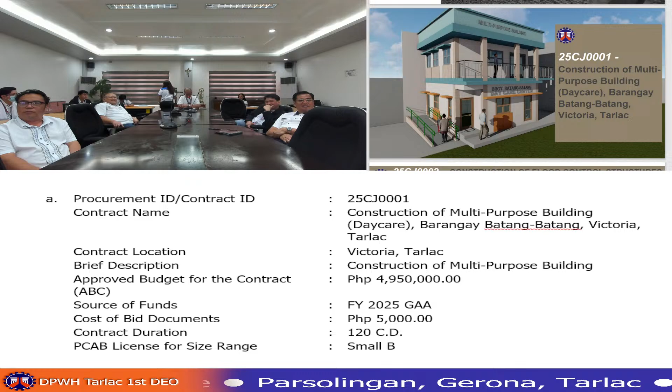Now we call on Engineer Romel Del Mundo for 25CJ0002.

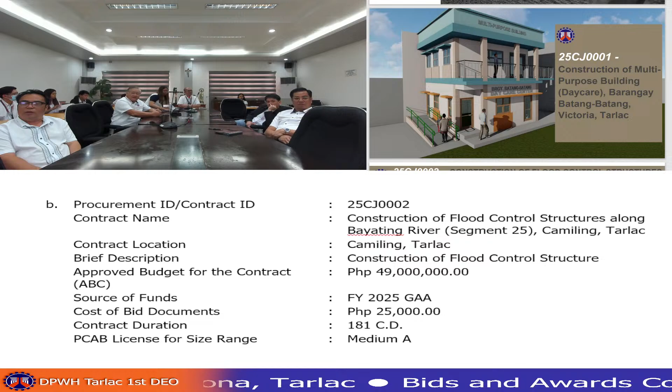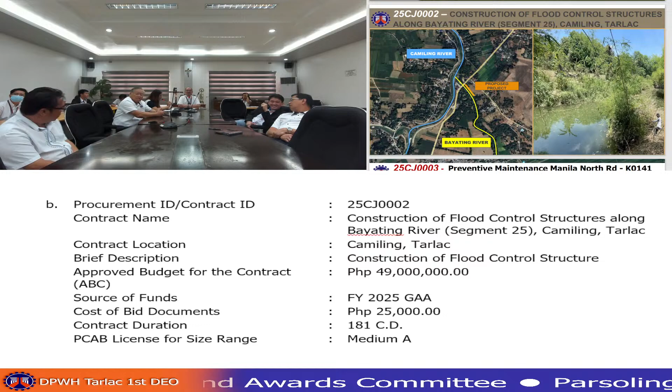Good morning everyone, I'm Engineer Romely Del Mundo from Planning and Design Section, presenting to you contract ID 25CJ0002 with contract name Construction of Flood Control Structures along Bayating River, Segment 25, Camiling, Tarlac. It has a target length of 165 linear meters, consisting of slope protection with road component. The project duration is 181 calendar days and with a total project cost of 49 million pesos.

The scope of works includes surface courses with 0.25 meter thick Portland cement concrete pavement having a width of 6.10 meters, miscellaneous structures of single arm, 10-meter pole, solar LED roadway lighting, 125 to 150 watts each, earthwork consisting of clearing and grubbing, structure excavation of common soil and embankment from borrow, and bank and slope protection works with reinforcing steel of grade 40 and 60, structural concrete with 20.68 megapascal compressive strength, and the type of steel sheet pile to be embedded is Z-type.

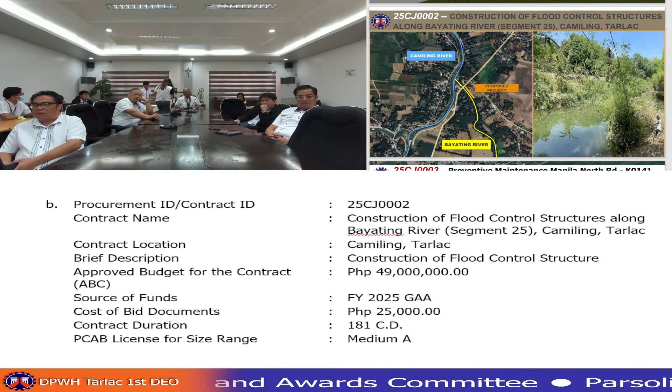Well, anyway, do we have any questions? How about on our YouTube channel, do we have any audience there? So thank you. So we call on Engineer Elmo Bernardo for 25CJ0003.

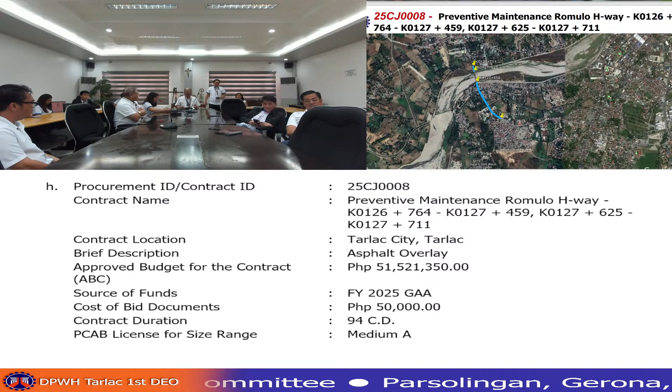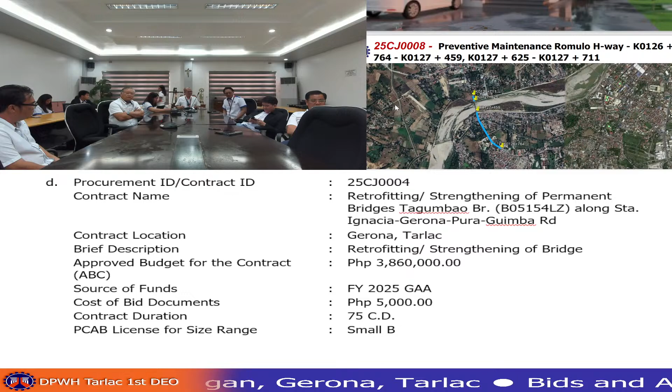Good morning po. I'm Shaira Jimel S. Guevara. This is to introduce contract ID 25CJ0004 with contract name Retrofitting, Strengthening of Permanent Bridges, Tagumbao Bridge, B05154LZ along Santa Ignacia Gerona Pura Guimba Road. The anticipated contract duration is 75 calendar days.

The bridge has a length of 680.80 meters, 2 lanes with a width of 3.66 meters, which includes the following scope of works. Bridge construction, which includes 7.32 linear meter expansion joints, 30 mm gap steel finger type, 202.85 linear meter epoxy injection on crack. That's all po. So do we have any questions?

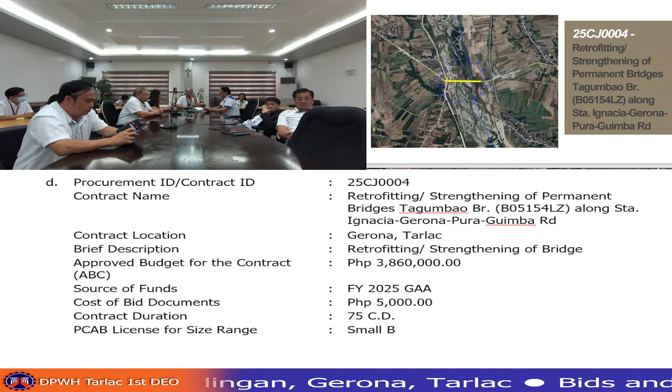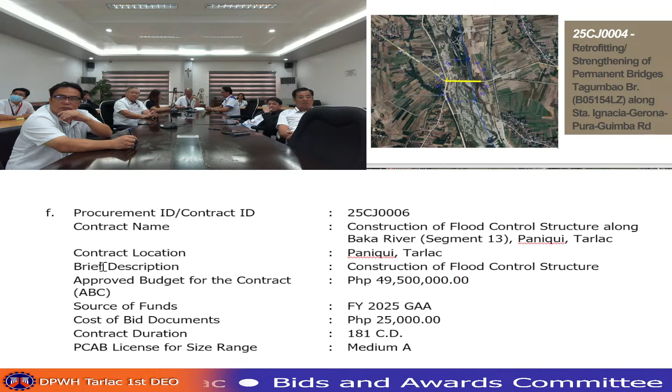The scope of works includes surface courses with 0.25 meter thick Portland cement concrete pavement having a width of 6.10 meters, earthwork consisting of clearing and grubbing, structure excavation of common soil and embankment from borrow, bank and slope protection works with reinforcing steel of grade 40 and structural concrete with a compressive strength of 20.68 megapascal. The type of steel sheet pile to be embedded is Z-type.

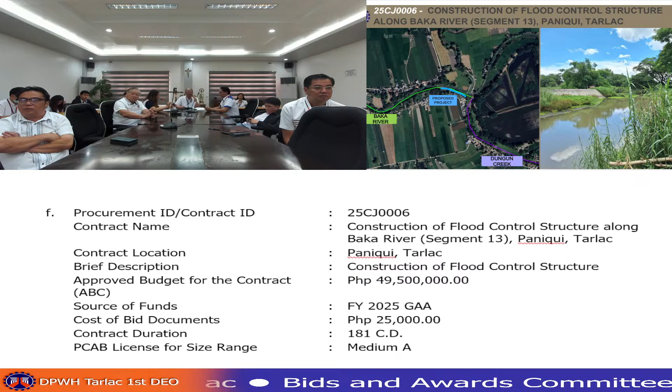You may proceed with your other project. Contract ID 25CJ0010, construction of flood control structure along Bayating River, Segment 5, Camiling, Tarlac. It has a project duration of 244 calendar days, having a total target length of 354 linear meters.

Approved budget for the contract is 96,500,000. The scope of works are as follows: surface courses having Portland cement concrete pavement with a thickness of 0.25 meters. Miscellaneous structures with single arm, 10-meter pole, solar LED roadway lighting, 125 watts to 150 watts each. Earthwork with 200 mm thick aggregate sub-base course and bank and slope protection works. The steel sheet pile length to be used is 9 meters.

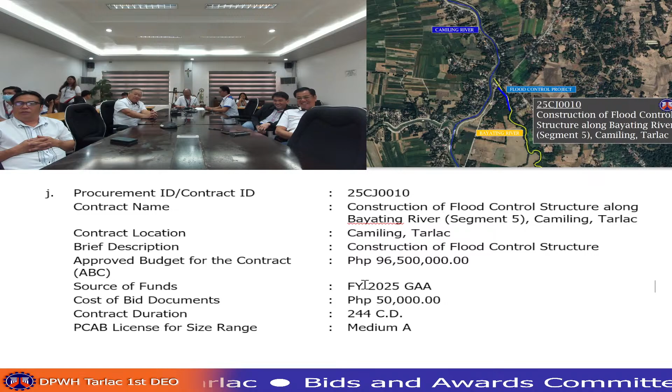Good morning to everyone. My name is Engineer Tom Adriel B. Cabanes, and I will be presenting two projects. For the first project, under contract ID number 25CJ0007, with the contract name Construction of Multipurpose Building, Health Center, Barangay Sapang Maragul, Tarlac City, Tarlac. Scope of works includes the complete construction of a two-story multipurpose building from structural to architectural finishing, and has a dimension of 10 meters by 6 meters.

For the next project, with the contract ID number 25CJ0009, with the contract name Construction of Multipurpose Building, Senior Citizens Building, Barangay Villa Aglipay, San Jose, Tarlac. The scope of works includes the complete construction of a one-story multipurpose building from structural to architectural finishing, with the dimension of 14 meters by 10 meters and has no demolition.